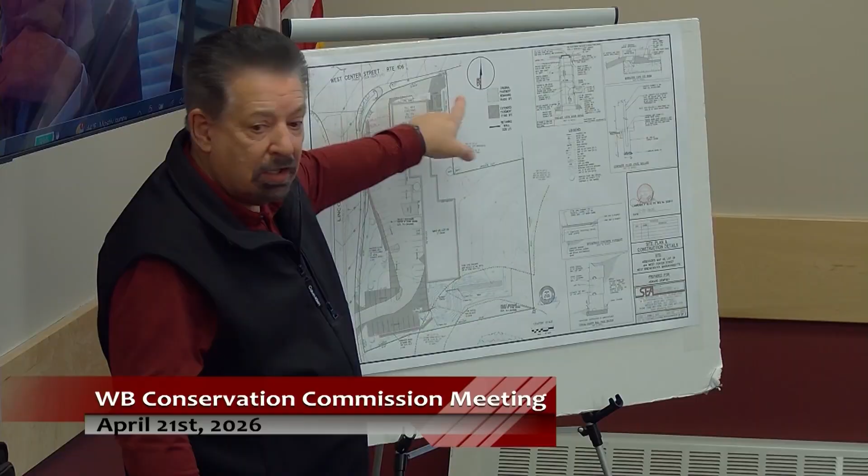That swale takes the water and directs it into this property, not the other one. It collects the water and takes it downhill, finding its way behind the building. The only activity going on here is this shaded area where they have one handicap parking space.

Everything else existing was all in here. But in here, there was enough room to put in the parking space and enough to turn around to get in and out of it.

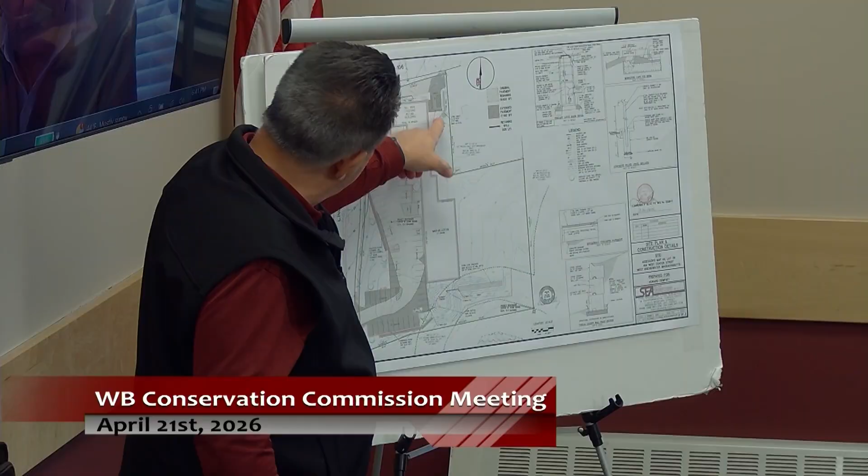Are they going to be removing the trees? There has to be removal of vegetation adjacent to the building here in order to construct that, but only to a certain distance back. There's a proposed block wall on the back side of that parking space—that's the limit of where anything would actually be removed.

We're trying not to remove anything we don't have to. That's fine, thank you.

Do we have anything to say about the tree removal? No—to get that parking spot in, what's there isn't a valuable amount of vegetation. It's pretty far away, like hundreds of feet, and it's not going to affect the stormwater or runoff at all. That's why that stone swale is there—just to collect that small amount right there.

Are they going to be putting a fence up along that property line? We don't show it as proposed there—that would be Dempsey's call if he wanted to put a fence, but it's not part of this, which is just replacing the parking. He never mentioned anything about wanting to put a fence along that stretch.

So would it be Howard's bill to pay for the fence, or the contractor's? Fencing was not part of the contractor's work—it would be up to Dempsey if he wanted to put something there. This project is to deal with the loss of the parking, replacing the parking.

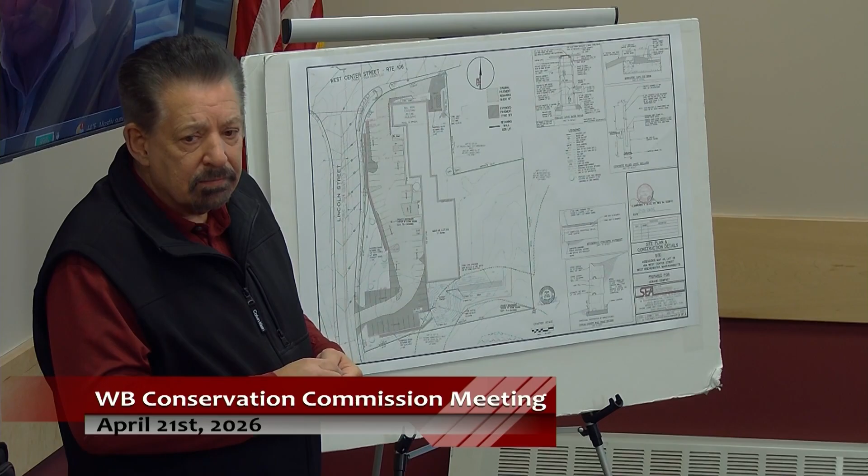If there are no more questions, I'll make a motion to close the hearing. I'll make that motion. Second. All in favor? Aye. Aye. And I'll make a motion to issue a negative three determination with conditions. I'll make that motion. Second. All in favor? Aye. Aye.

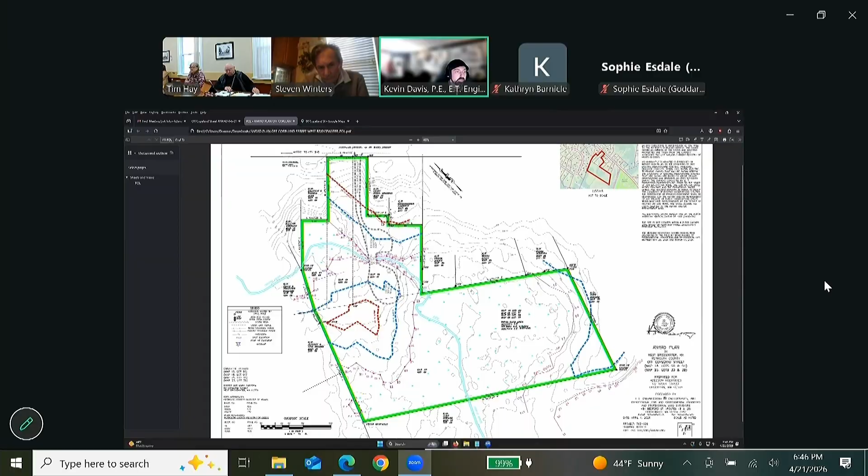On this particular property there is an existing gravel driveway going off of Copeland Street that comes down, crosses the Cotis Brook on an existing wooden bridge, and comes to this existing gravel area right here.

There are a few resources on the property. The first resource, which is the one we're particularly interested in, is on the northwesterly side where this gravel area is. This was all delineated by Brad Holmes of Environmental Consulting and Restoration LLC. There is also the Cotis Brook, which runs easterly then southerly through the property.

There is a second resource area to the southeast. This entire area abuts our area of concern, but an additional line was delineated on the southeast end of the property. We're not really interested in doing anything over there - that's not really part of the property or the project, but we're showing it for the benefit of the commission in case there were any questions.

The current ask of the commission is just to confirm the existing wetlands on site. We're not looking to do anything extravagant, no subdivisions - just a simple single-family home on the property is ultimately the goal, depending on where these wetland lines are finalized.

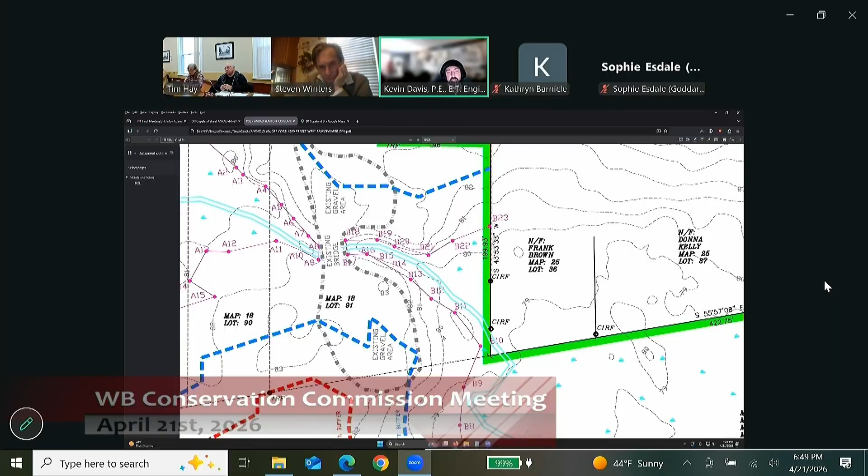If I may add, we're also planning on, after this, filing for a notice of intent, which will be back before the commission with the actual project and what we're planning to do.

Because of the fact you haven't walked it yet, you want to continue? Well, I have walked it, but I have questions I have to meet with Brad to go over his delineation and mine and come to an agreement on where the line actually... So my recommendation is to continue to the 5th, and by then Brad and I should be able to.

Any questions from the audience? I got a question - what is the classification of that river, as far as perennial river or what would you call that stream going through there?

I believe it is a perennial stream. I can get confirmation on that, but my information says perennial stream. I've also seen it come up as intermittent, and I believe DEP actually had it as intermittent. It has typically gone dry in different sections on a regular basis. There are a number of wetland marshy areas in between, but between areas it does dry out at times.

So would that continue to have a 200-foot distance as a minimum to put any septic from that river? We live on that river, I have property that goes to that river. Would that mean 200 feet from the south bank? Right, so they'd have to be 100 feet. 200 feet jurisdiction, 100 feet would be regulated if it ends up being a perennial stream. If it's intermittent, then it falls to either the wetland line or the 50-foot buffer.

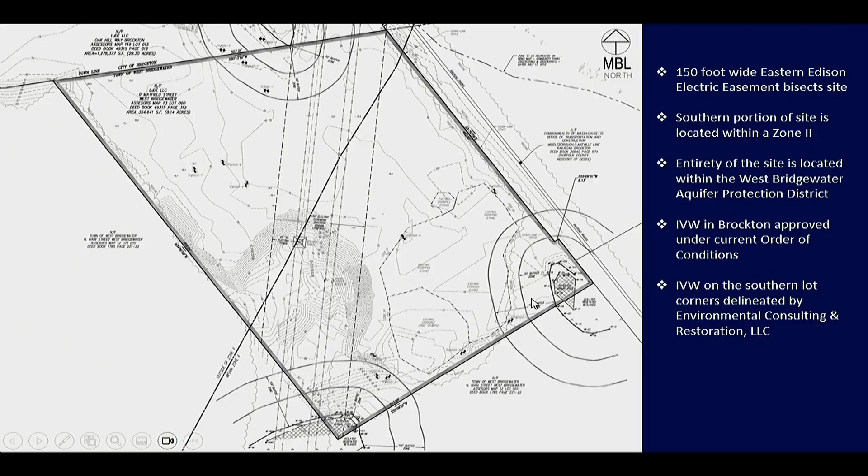To give an overview of what's proposed overall: in Brockton, Lou has a 20,000 square foot building that's going to be the new home office of his EOMS Recycling, his corporate office building. That's going to go in Brockton, and just as previously proposed, a portion of that development, that one basin, is being proposed now in West Bridgewater to handle some of the flows from Brockton. On the West Bridgewater side, he's proposing a few contractor storage yard areas - a couple smaller ones here, and then a larger one on the other side of the electric easement.

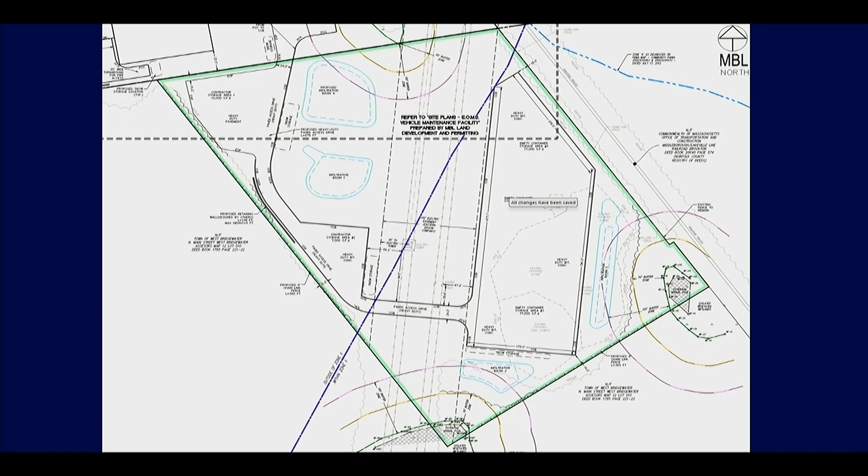There are 3 proposed basins associated with that. Those storage areas are going to be paved, have curbing, and a stormwater management system that we'll go into more detail on. That's just to give an overall view of the whole site. Here's the site layout blown up: we have the smaller 12,000 and 7,000 square foot storage areas, and the larger 77,000 square foot one on the other side of the easement.

You can see the 2 outlines of the proposed drainage basins. Both of those basins are located so that their spillways are still outside of the 50-foot buffer zone.

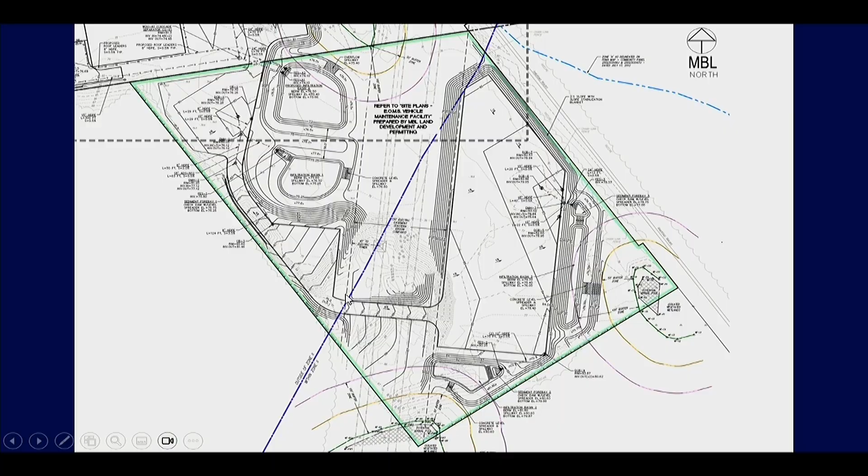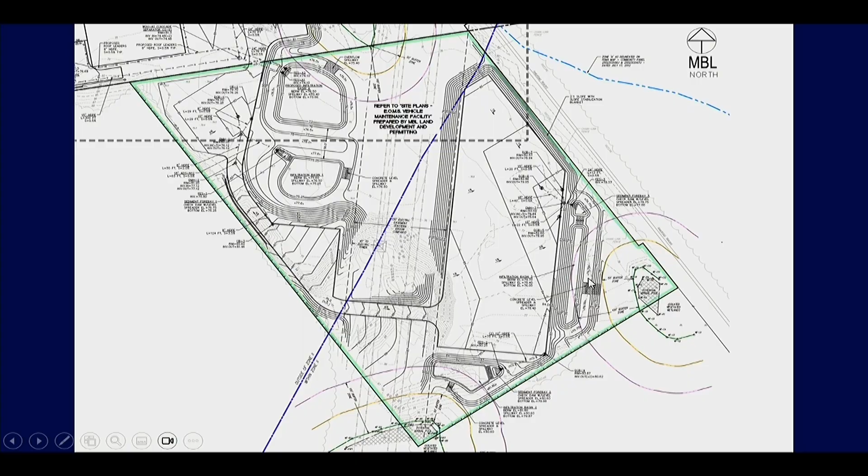This is the erosion and sedimentation control plan showing where we have some stockpile locations. We're proposing perimeter sediment controls around the limits of the site, along with filter mat erosion controls.

The site is pretty much already cleared. The only clearing, which I should have gone over, is a little bit right over here on the down gradient side of the basin spillway. The tree line is shown if you look closely on the plans, so there's very minimal tree clearing associated with that.

That's pretty much it for my summary. If you guys have any questions, I'd be happy to answer them.

So I can give my wetland report to start with. I did check the lines, I'm okay with them, they all match. I will say the one closest to the railroad line that is labeled potential vernal pool—

I think it's just a wet area, I couldn't see any life in that pond at all. I will say the one to the south had a couple of frogs and two turtles in it. Couldn't get a picture, they moved too quick on me, but that one may function as a vernal pool.

My recommendation might be to see if we could move that stormwater structure as far away as possible. I know you're at 50 feet, but if you could give it any more buffer—I know it's within the easement for the utility, but some of it does fall outside of it, and any protection would be appreciated.

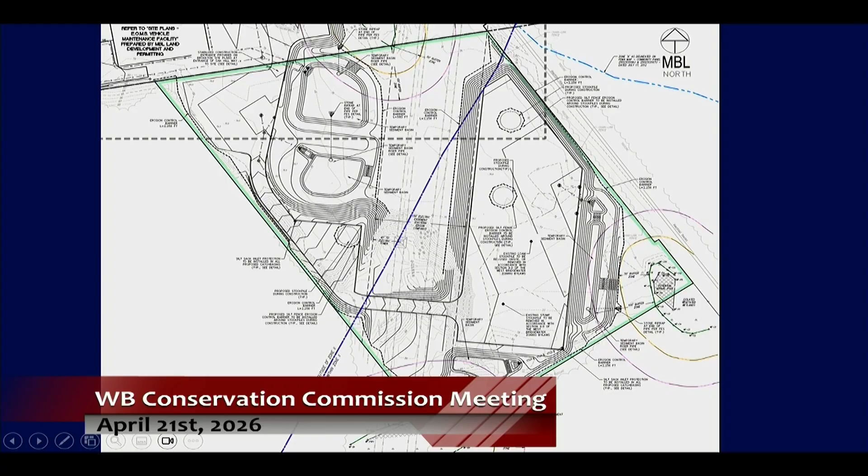So the vernal pool habitat area and the Wetlands Protection Act stops at the limit of the wetlands, as does the local bylaw. Is it all paved, or is there a combination of paved and gravel?

No, it was switched as we were going through the zoning board process. Originally, when we started this a few years ago, the bottom area was going to be gravel, but there were concerns about stormwater and treatment being in the aquifer, so we were asked to do pavement. So everything's pavement going into the treatment system.

Where is the treatment system proposed? There are three. A portion of this area goes into a catch basin, to a forebay, and then to this basin. There's a catch basin right here that'll catch this portion. Same thing—into a sediment forebay into a basin. So we're going to get that 44% pretreatment before the 80% in the infiltration basin.

And then this top area here, there are catch basins, and same thing—sediment forebay and basin. This again is to handle the Brockton flows, but it is in West Bridgewater, and that's designed the same way: deep sump catch basin, sediment forebay, basin.

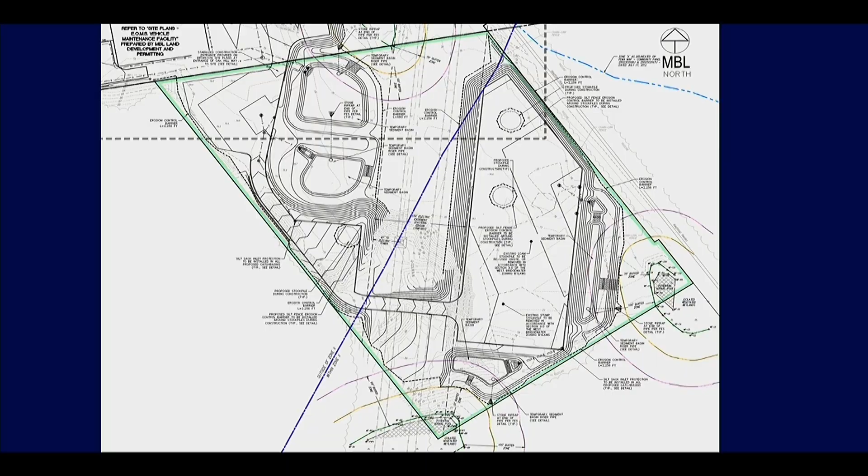This one is designed using the previously approved infiltration rates and groundwater. That's where my concern comes in, because the previously approved—we're pulling that all out. The process for that: West Bridgewater reviewed and used all the calculations for the Brockton project.

I know that project has changed and the footprint's changed, so to have all that stormwater, we just need the calculations for the Brockton side to make sure—send me that, let me know where it's coming from, because if it's not sized right, that function won't be what it was originally getting. But we can send you that drainage report, and Brockton is sending it for peer review as well.

We were closing out the West Bridgewater filing. As for the Brockton one, we're closing it out too, rather than amending it, just because the scope of work has changed so much. It's easier to close it out and get a fresh notice of intent for all the work.

I have 328-729. This goes way back to the composting facility in West Bridgewater that started this whole project. The Brockton side on the plans only shows the new corporate office space, a pad for future use, and what's listed as a repair maintenance facility.

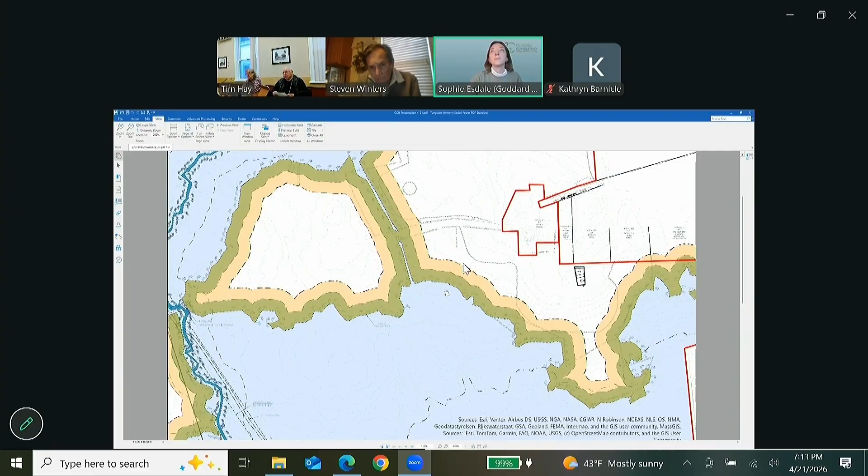This is the westernmost portion of the Samuel Ave parcel, and then the Brooks Place parcel to the west of the site. So this is the GCJ series, and this is the GCA series. The intermittent stream flows in between these wetlands.

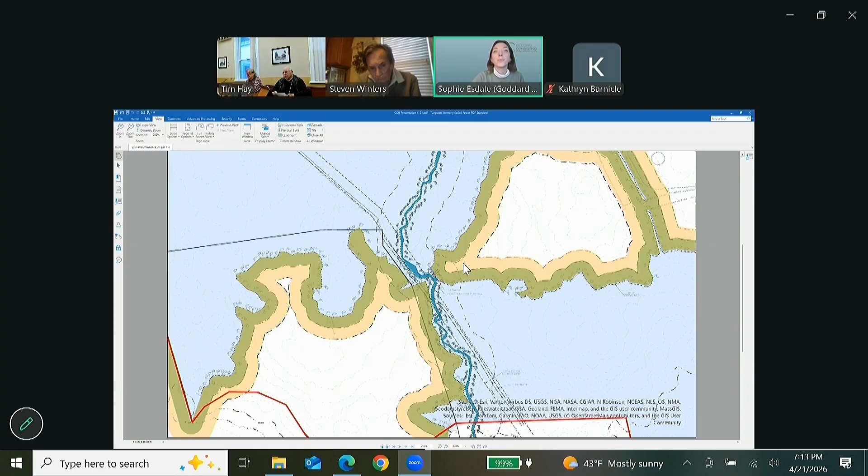It was previously a bit lower, somewhat in line with GCA 42. We bumped it out a bit to incorporate a small patch of wet area with hydric soils and wet vegetation in this area. The second flag that we made revisions to was GCA 160.

Let me just pull that up. So that was GCA 160 right in here. It was previously out a bit farther, so we bumped it back a bit to also incorporate an area of hydric soils and wet vegetation as agreed upon with Tim as well.

And the final revision was GCJ 141, which was a bump out here as well. Each of these revisions were confirmed in the field with Tim, and we agreed upon a location to revise these flagging locations. I'd be happy to answer any questions from the commission at this point.